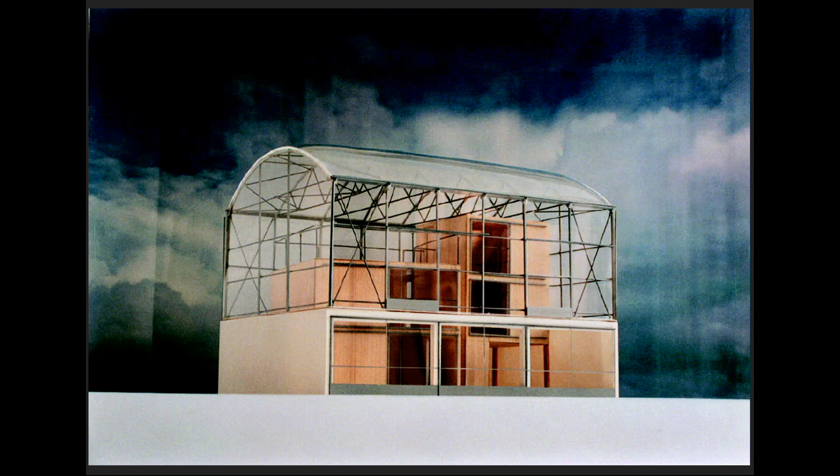This house was also the result of a first project that we did for this family, which was really based on the principle of a greenhouse mounted on, built on the wall. Inside, we had boxes where we could find the rooms, bedrooms, the living room. Unfortunately, this project was a little bit too expensive, something like 10,000 over the budget. So it was necessary to work again, and we finally proposed the other project.

But since that time, and much before, while we were studying architecture with Jean-Philippe, we became very fast interested in agricultural greenhouses. Around the city of Bordeaux, where we were studying, there were a lot of these greenhouses because it's a region for vegetables, fruits, and flowers.

We were interested first by the big amount of light, the atmosphere inside like outside, but protected from the rain, and also the huge skill of this construction in managing the climate inside, with a very high precision of half a degree, using only natural elements like overventilation, transparency, and shading. We wanted to use this construction in architecture, to see what we could do with that in housing projects or anything else.

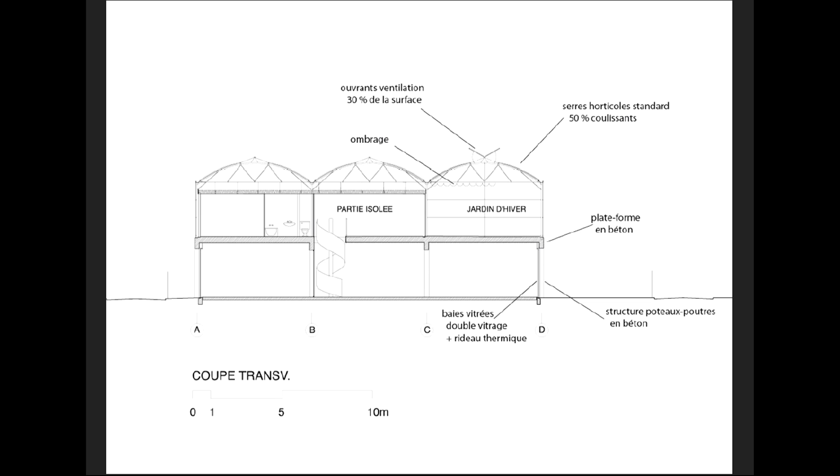So here again we were pushed to build much more than the standards of social housing, and we used prefabricated construction in order to build on the plot the maximum volume, based on 2 levels: a ground level with concrete construction with 2.7 meters under ceiling, which provided the platform on which we built 3 ranks of standardized greenhouses. Then inside the greenhouses we rebuilt. We considered that we had built a kind of big loft, and inside we divided it into 14 dwellings.

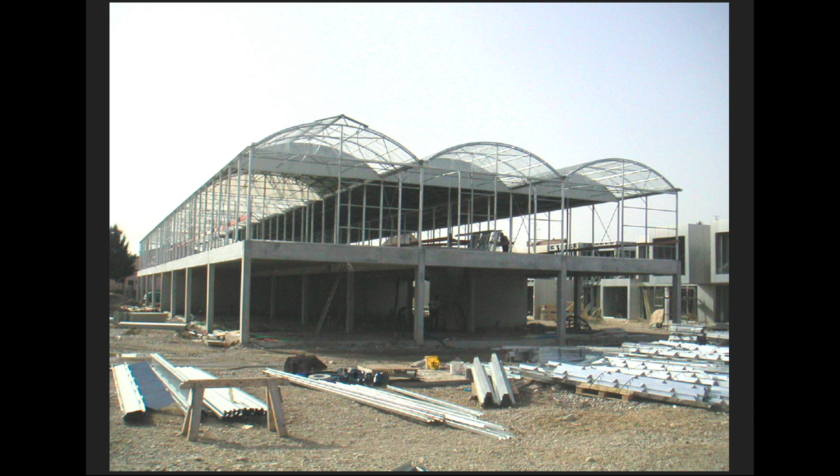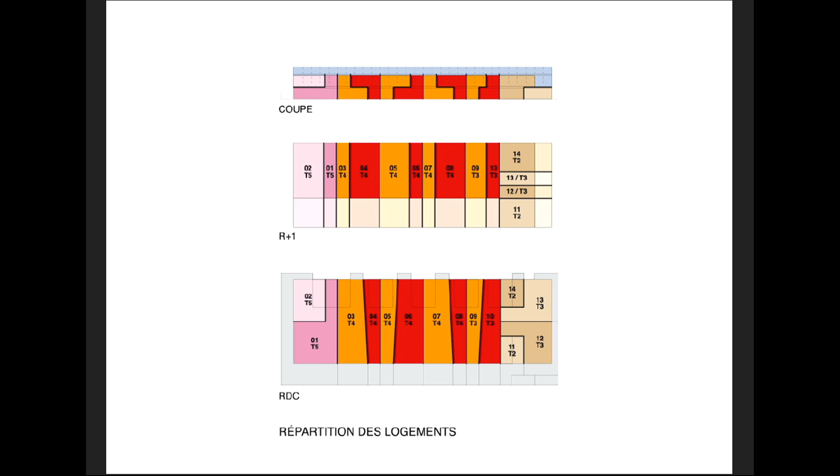This simple construction allowed us to be very economic in building the structure, so we could use this economy of construction to give more space within the budget. That was the division of this volume into 14 dwellings, with the rule that every dwelling should have space on the ground floor and space on the first floor.

But it also counts on the action of the users, to open when it's necessary to open, or to close curtains, but also even to move inside the house at different moments of the day. The users understand very well that in summer at midday it's not the right place to be in the greenhouse, but it's better to be on the ground floor on the north side, while in the afternoon around 6, it becomes much better to come back to the greenhouse, because then you have a better temperature.

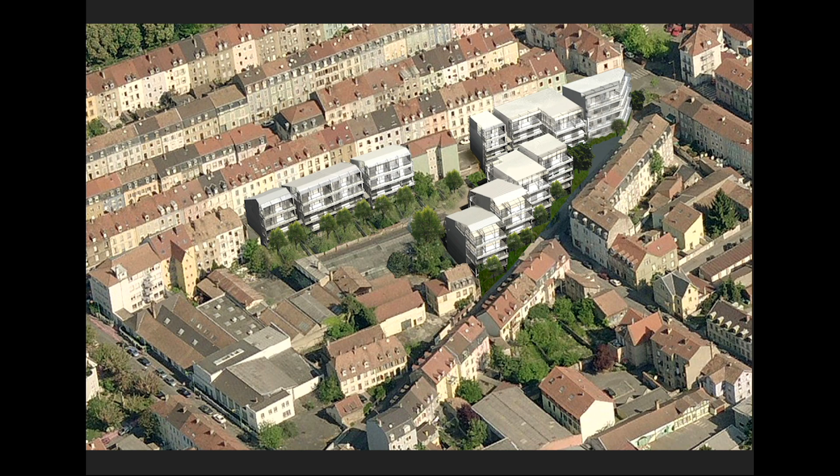For the same client, we did recently another social housing project in the same city. Here the density was much higher, and we had to build 4 levels, ground floor and 4 levels. But that was the common agreement, without any discussion at the beginning of the process, that we should go in the same way of doubling the standard space of social housing.

So here it's built in different conditions, but all the flats, some have 1 level, some are in duplex, but all have crossing orientation. All of them have winter gardens. On ground floor some have little gardens, and on the upper floors they have balconies.

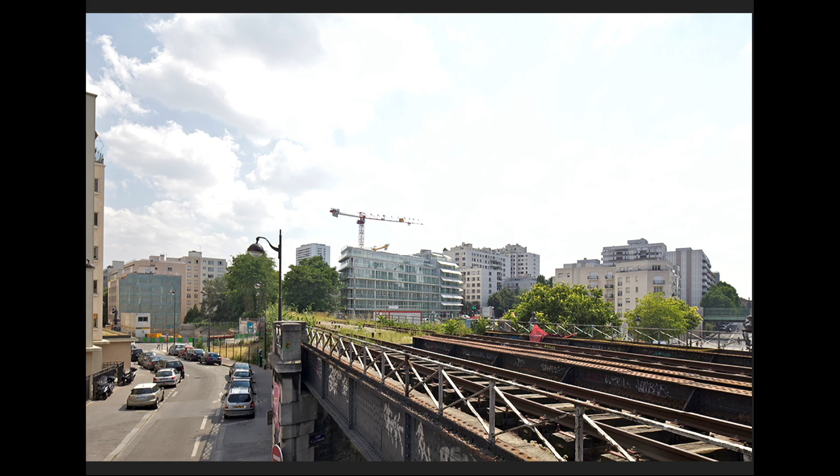And the last levels with some more height in the ceiling. Again, this winter garden and some terraces. On the same principle, but more and more with bigger densification. This is in Paris.

It's a multi-purpose building for housing, social housing, student housing. But also we have a little institution for disabled people - we are hosting here 6 rooms. And also shops and retail and a little art gallery.

So here again, that's the same principle of trying to get maximum light, maximum transparency, and then this transparency and this light is filtered by systems of shading, curtains, winter gardens on the garden side - all these systems that allow filtering of the light, the view, and these 4 elements.

It means 2 facades and 2 sets of curtains, combined all together, sometimes all closed, sometimes all open, half closed, half open. They allow very good control of the temperature and the climate inside the dwellings.

As it was said in the introduction, we are also much involved in the modern housing heritage and what to do with all these dwellings, these blocks of dwellings built in the cities in the 60s and 70s. And it's time now, since 10 years in many countries, to think what to do with this important heritage of housing.

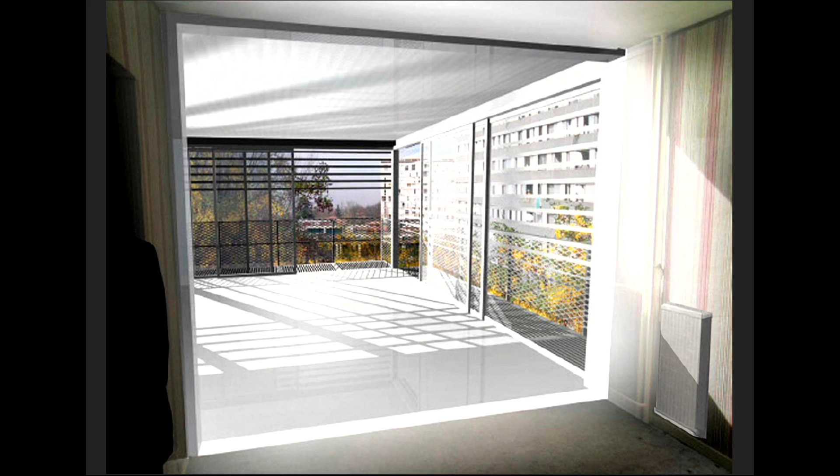And we could see that there was always a solution to transform, to open, to make what was not done at the time - meaning give more light, more space, make extensions - and doing that to change quite radically the life inside.

But again, from the inside out. It means that we were much involved in checking what was not working inside the dwelling of the existing buildings, much more than the appearance of the buildings. And the goal was to bring from the inside more space, more light, more possibilities of uses.

And doing this extension, transformation, opening - also the transformation of the building was radical. So on different examples, we arrived at the conclusion that in terms of structure, it was always possible to do something. In terms of economy, the cost of those transformations was between 40,000 to 60,000 euros - it means 1/3 of the cost of demolition and rebuild.

We had the opportunity to make a very few projects, the one mentioned in Paris, but now I will show you another one which we have completed recently in Bordeaux, based on the same principles of opening, giving more space and giving more light.

This is in this neighborhood in the city of Bordeaux. When it was built in the 70s, it was not really in the city center, but nowadays it's really in the center and a quite nice place to be.

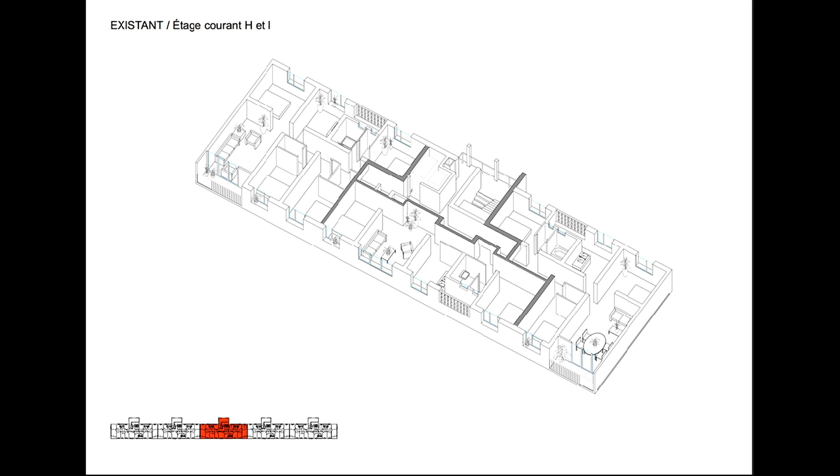The proposition was to make a large extension on the south side, 4 meters, and to open all the handrails of the windows so that it would be possible from any room to move to the extension, and also to change the mobility inside the dwelling, not always from room to corridor and to another room, but also with another possibility to move through the winter garden.

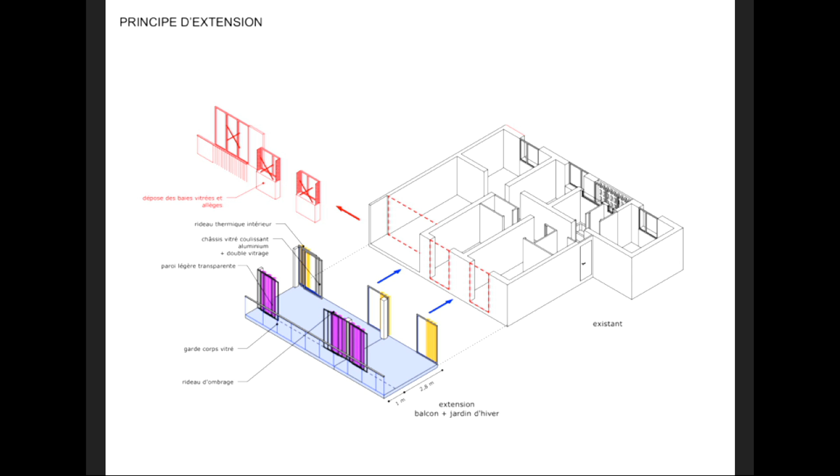The process included the fact that all the families would stay during the construction. There was no possibility to move anyone. So we studied a process that would allow this to happen with just a few apartments empty, for just a stay of one day when we did some important works.

We also used the capacity of the roof to introduce a few new dwellings on top. The process of construction started, and with this system of elements, modules that were built off-site and just brought to be installed on the building, we arrived at this transformation of the building.

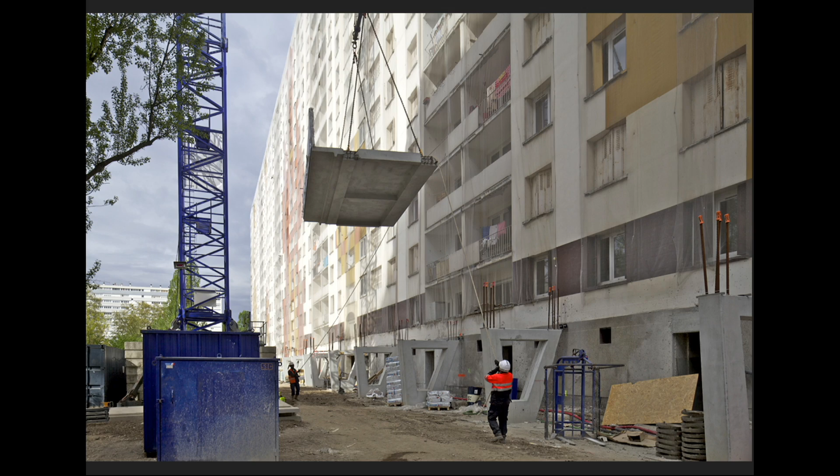The process is this one: first, we built the foundation, because it's self-supported — not supported by the existing construction. Then we bring these modules, in this case 4 meters by 7.5 meters.

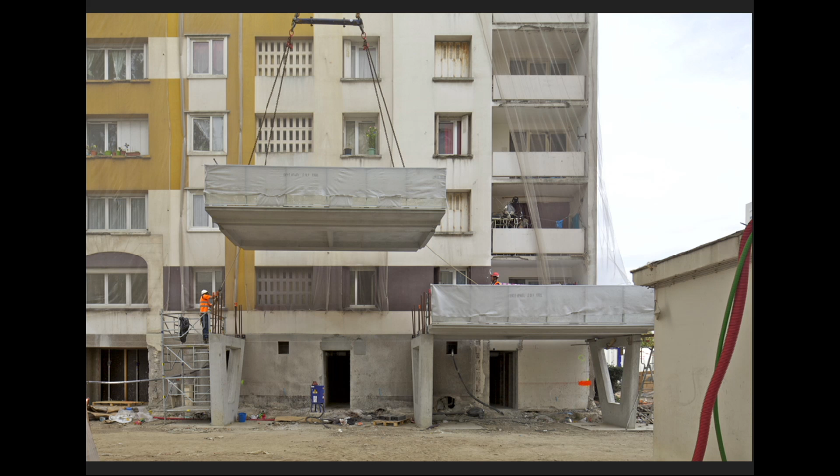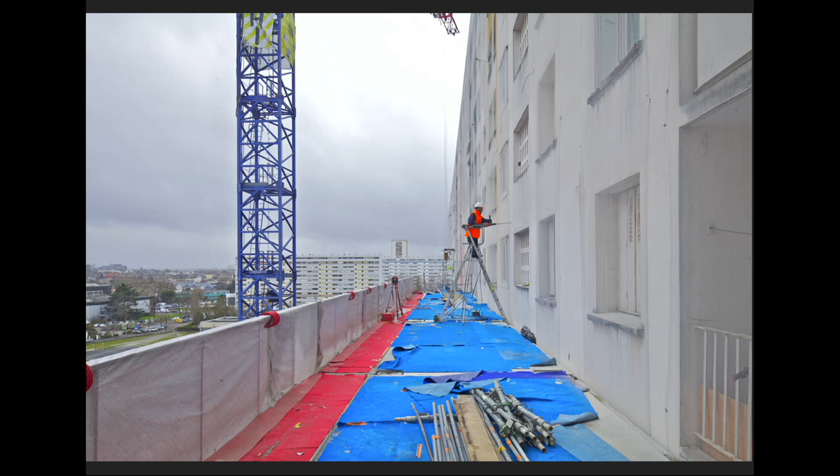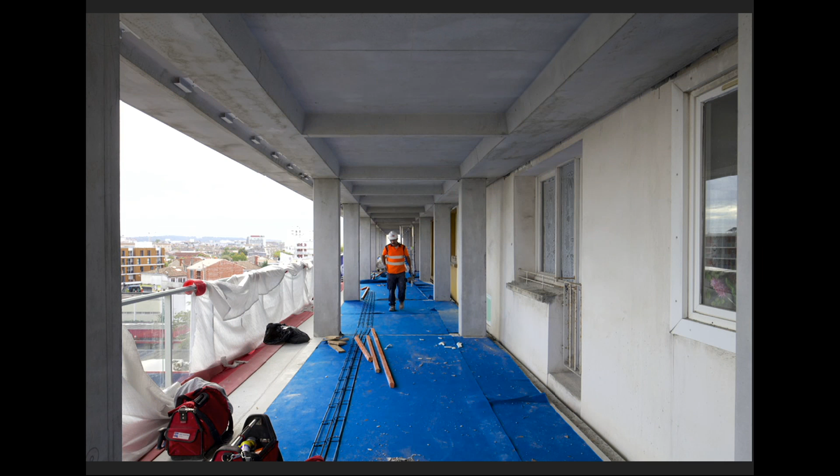With a handrail — the final handrail — already built. It's also used by the workers, but it's the final one. Then, level by level, the process of construction continues. During this phase, there is no disturbance to the inhabitants because we are working in front, so they don't suffer from anything. And when 3 levels are built, we can start the process of opening the handrails.

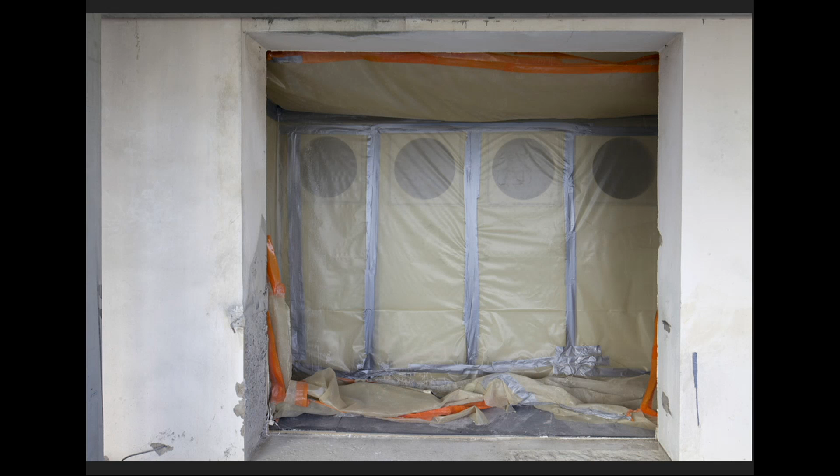The commitment made with the inhabitants was that this process of opening the railings and replacing them with the new sliding glass door should take 2 days at maximum. More or less, it was done this way for all 530 dwellings — a great performance from the companies, since we had a chain of 3 companies doing this work.

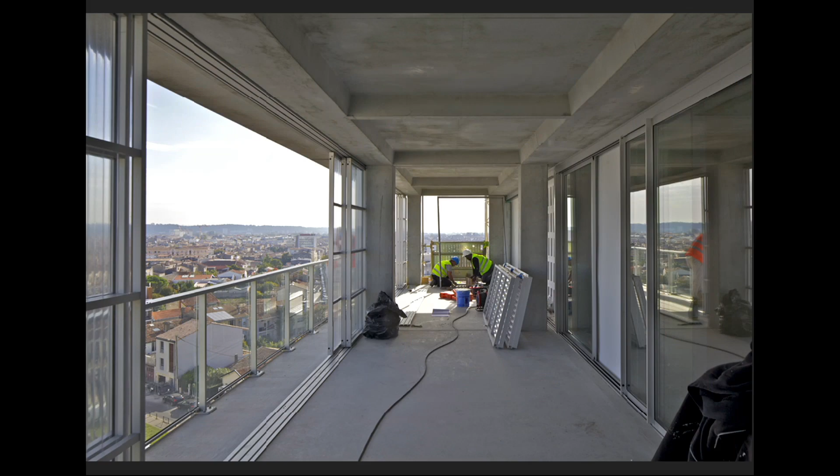The longest part was finally repainting inside, around where we had cut the handrails. And afterwards, we could open the space to the families.

So the transformation is radical for a cost of 45,000 euros per dwelling, which is mainly financed by the company. They got little subsidies from the city, something like 10% of the budget, but due to the big amount of rent income they get every month, they could also get a credit to build this extension.

So if this is possible for a social housing company in this condition, that could also be possible for private ownerships that many times are not subsidized by any public institution. But it's possible to make a positive financial operation.

And some pictures before and after. Most of the dwellings get something like 50 square meters of extra space.

And then we had the second process of interior renovation to renovate electricity, bathrooms. Also, we changed the elevator. We created new elevators to multiply the facility of access. And sometimes we also had to make new paintings. So from this situation to this one.

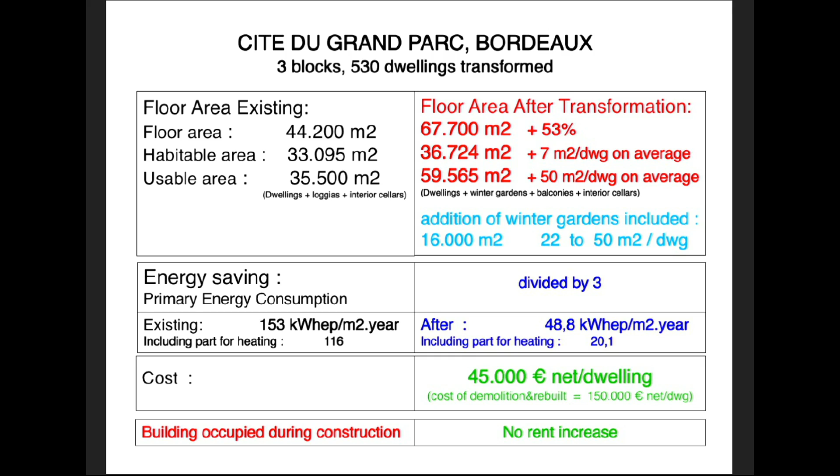That was a discussion between the inhabitants and the owner, because they have less expenses for heating or for different charges, and the rent of the apartment is compensated. So in total, they don't have any increase of the rent.

So just a few examples of public buildings, which is the third part of my presentation and also an important part of our practice. But always with the same ideas of giving more space for program, but also for appropriation. As I say, our goal is always to give as much extra space and program space that allows us to extend uses, to invent uses, always giving light, giving views, giving this possibility of being inside and outside at the same time.

So this is a school of architecture in the city of Nantes. That's a program for a school of nearly 1,000 students. The program was 9,000 square meters, and finally we built 18,000, plus a big amount of outdoor terraces.

Always by using very efficient constructing systems, like big concrete systems, using also a design of elements which introduces repetition, but also using the most performant elements from catalogs, from manufacturer catalogs. The best dimension for sliding doors. Every manufacturer has a product which is the most efficient in terms of amount of material and cost, and we try to work with these manufacturers to know what is the most efficient.

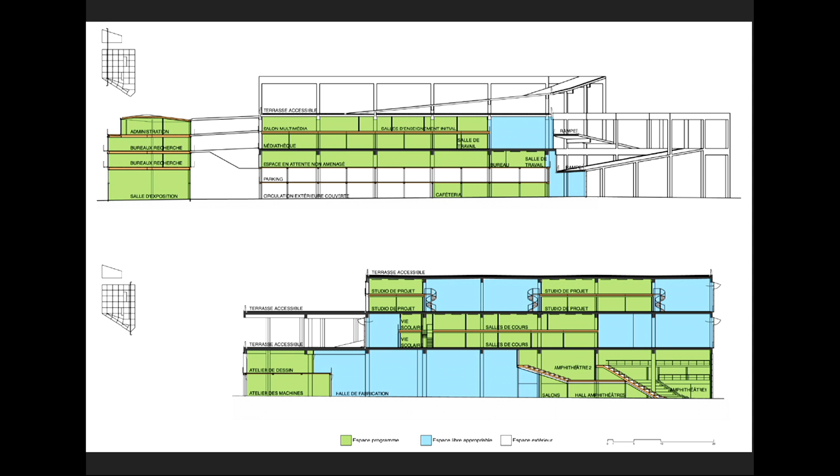So this extra space also allows us to introduce climatic space. Here in green, this is the program with classrooms, auditorium, library. And in blue, this is the unprogrammed space, but which has mostly different conditions of heating, of temperature.

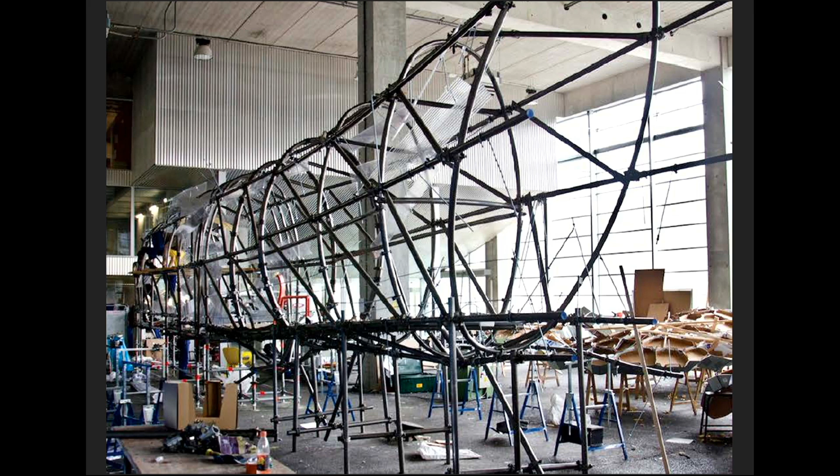So in this place the uses are very various, and it really meets the expectations of the school with different pedagogies, different programs. Even the large auditorium has this large opening onto the square.

It was one of the expectations of the scenography department to test this, and it's not only used for courses, it's also used for external events like dance, theaters, or conferences. So the school is also able to host a lot of events of the city, which many times ask the assistance of students to prepare these events.

Here, in this extra space, there was, for example, a kind of virtual model of the city of Berlin, a plan which is totally wrong, but was supposed to be a vision of the plan of Berlin. And always this perspective, these views and light given by the space, but also always controlled by curtains, by shadings.

A large ramp links all the levels, and it allows terraces at every level, which can be used by students, but also for different events or uses, concerts, or like this last summer, outdoor cinema that stayed here during 3 months.

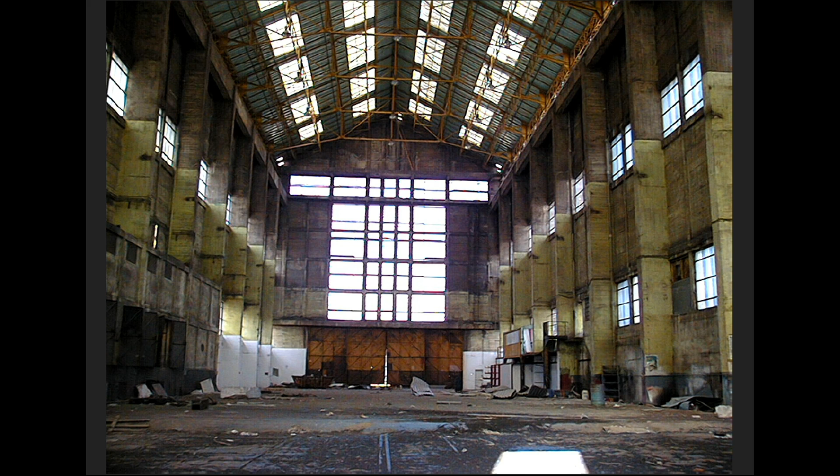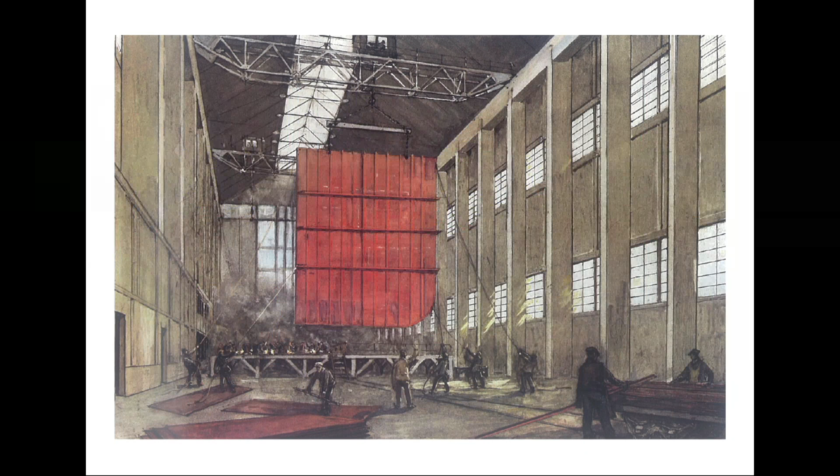So the visit was amazing. We discovered this huge space with a high capacity of space, of light, a floor that could support 5 tons per square meter, because they were used to having big pieces of boats inside. And we had very fast the intuition that it was a mistake to fill this space, that we would lose something fantastic by filling it with floors.

So starting from this situation, that was more or less the program requested. And we proposed in the competition to keep this space totally empty and to build a twin, totally new, on the right, which could offer in the best condition storage and exhibition space, while we could keep also the use of this amazing space.

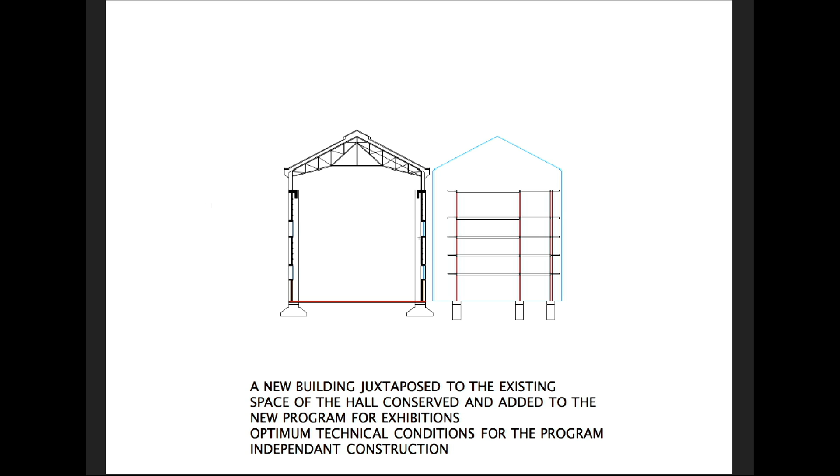And the new building was made with a core, with a concrete structure, and a second envelope, totally transparent, which also has an important use for climate control. That was the rendering for the competition, and the building completed.

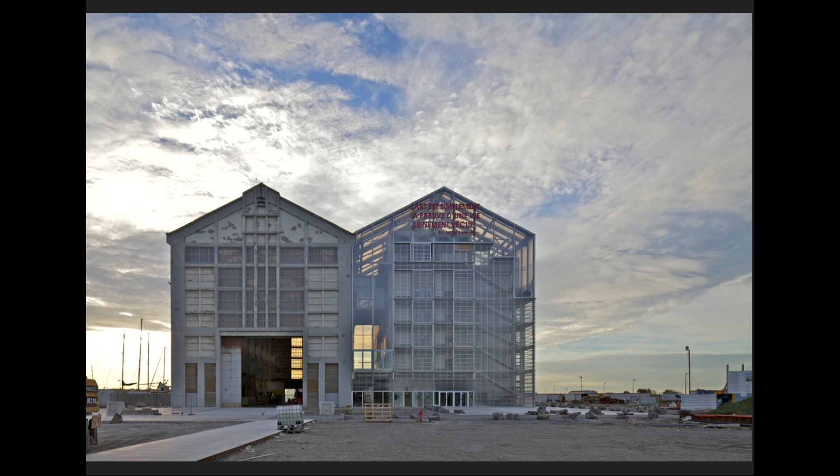So we could achieve all the intention, but also the expectations of the program.

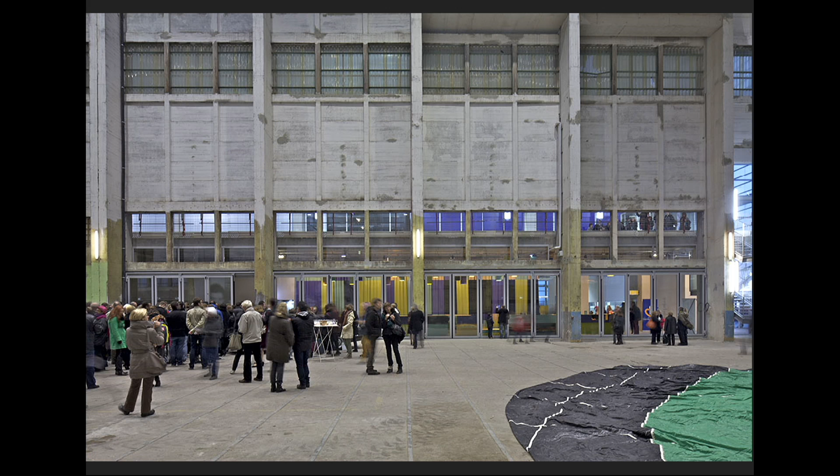So the connection from the existing to the new is through just a few openings. A system of staircase, which is in the envelope, between the core and the envelope, that always allows you to take profit of the wonderful view on the sea.

One of the most important exhibition spaces with 9 meters on the ceiling, that was requested by the program, but also some other little rooms.

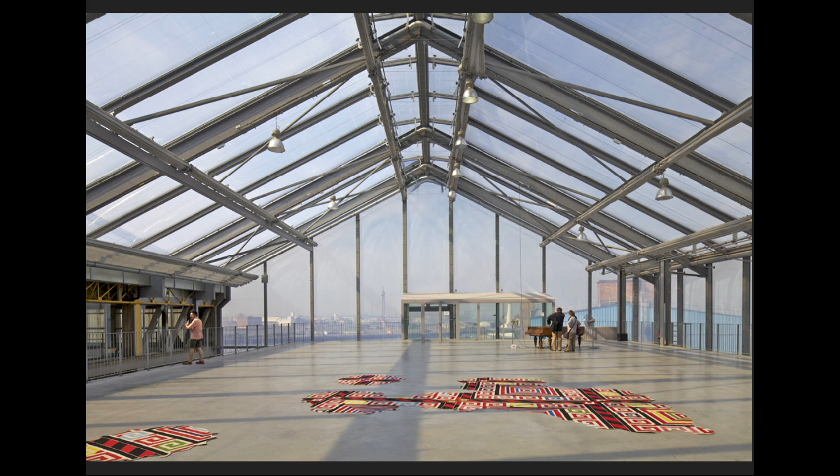And the last level, which is unprogrammed, but which is a result of the block for storage and exhibition, and this envelope done with ETFE, that also has all the system of ventilation and shading that allows control of the good climate inside.

But it's offered for use, and there are a lot of exhibitions, but also parties, opening parties.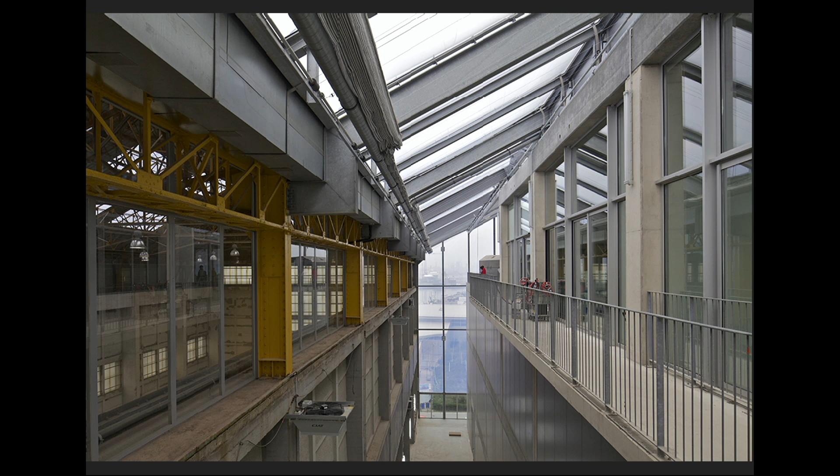The gap between the new and the existing, and they are really twins. That was for us the best way to associate this existing and the new without any competition and without any demonstration.

Thank you very much, Anne. We have time for questions after the morning session, and we have seen a very wonderful presentation of some very climate-responsive architecture, very experimental and open, and perhaps we should invite Anne to come to Berlin and look at some of the buildings around us here and do a similar transformation, as it has clearly shown that humans can grow in greenhouses with lots of daylight. So thank you very much for your talk.